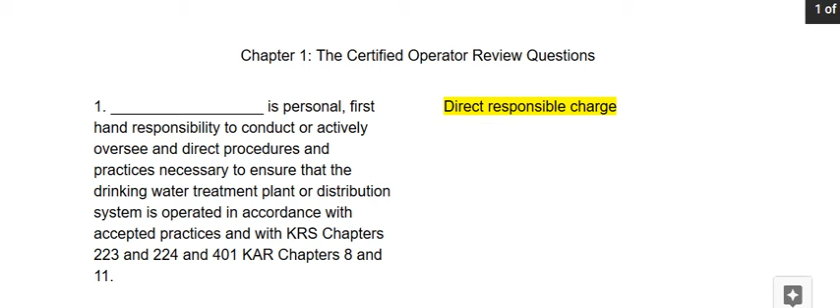Number 1. Blank is personal first-hand responsibility to conduct or actively oversee and direct procedures and practices necessary to ensure that the drinking water treatment plant or distribution system is operated in accordance with accepted practices and with KRS Chapters 223 and 224 and 401 KAR Chapters 8 and 11. The answer to number 1 is direct responsible charge.

Number 2, a certified operator shall be blank, blank, and blank in applications, reports, statements, and testimony provided to the cabinet. The answers to number 2 are objective, truthful, and complete.

Number 3, a certified operator shall ensure the blank of the samples that the operator blank, blank, or blank so that the result shall be a true representation of water quality. The answer to number 3 is integrity, collects, prepares, and analyzes.

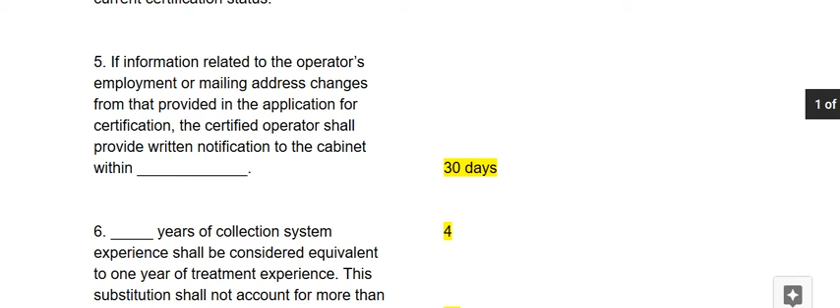Number 4, while on duty, a certified operator shall carry blank, showing the operator's current certification status. The answer to number 4 is a cabinet-issued wallet card.

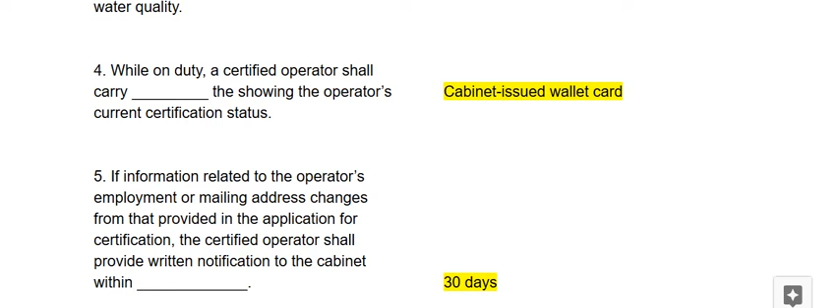Number 5, if information related to the operator's employment or mailing address changes from that provided in the application for certification, the certified operator shall provide written notification to the cabinet within blank. The answer to number 5 is 30 days.

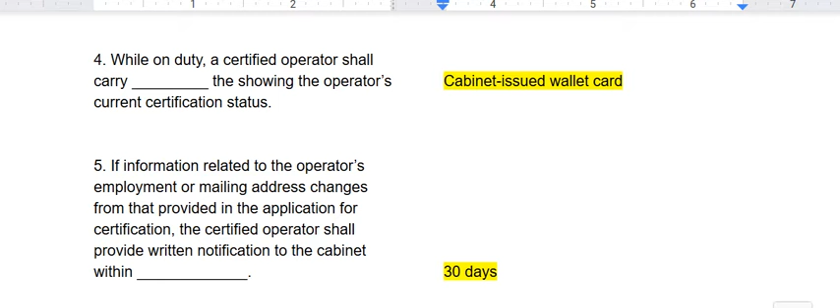Number 6, blank years of collection system experience shall be considered equivalent to 1 year of treatment experience. This substitution shall not account for more than blank % of the experience required. The answers to number 6 are 4 and 50%.

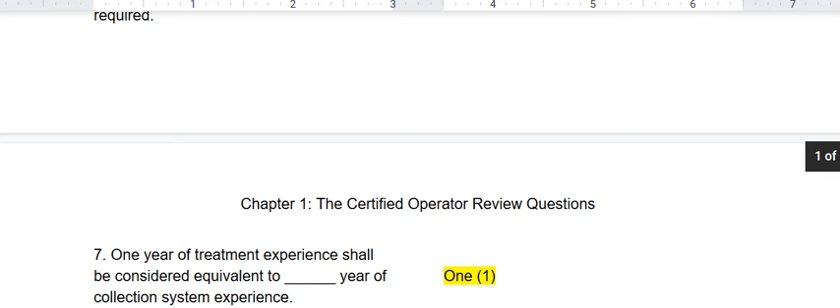Number 7, 1 year of treatment experience shall be considered equivalent to blank year of collection system experience. The answer to number 7 is 1.

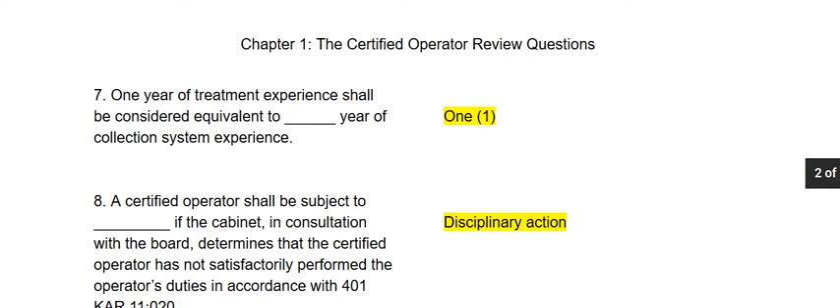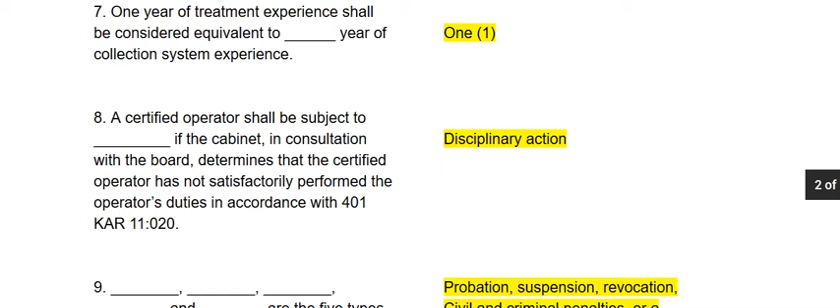Number 8, a certified operator shall be subject to blank if the cabinet, in consultation with the board, determines that the certified operator has not satisfactorily performed the operator's duties in accordance with 401 KAR 11:020. The answer to number 8 is disciplinary action.

Number 9, blank, blank, blank, blank, and blank are the 5 types of discipline that an operator can receive if the board decides that disciplinary action is necessary. The answers to number 9 are probation, suspension, revocation, civil and criminal penalties, or a combination of the 4.

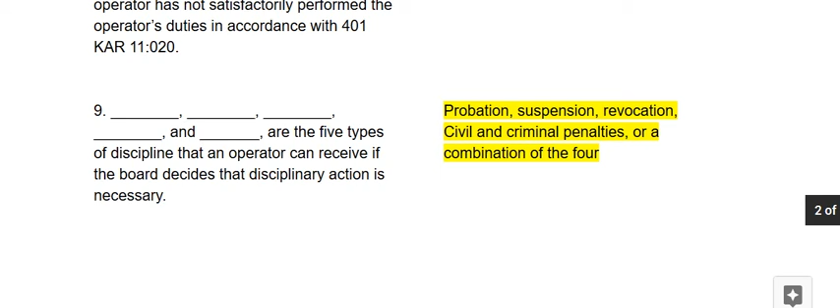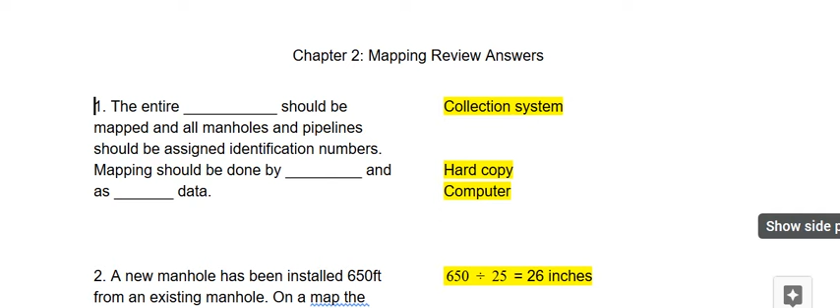Chapter 2, Mapping Review Answers. Number 1, the entire blank should be mapped and all manholes and pipelines should be assigned identification numbers. Mapping should be done by blank and as blank data. The answers to number 1 are collection system, hard copy, and computer.

Number 2, a new manhole has been installed 650 feet from an existing manhole. On a map, the scale is 1 inch equals 25 feet. What is the distance between the manholes on the map? The answer to number 2 would be 650 feet divided by 25 feet, which equals 26 inches.

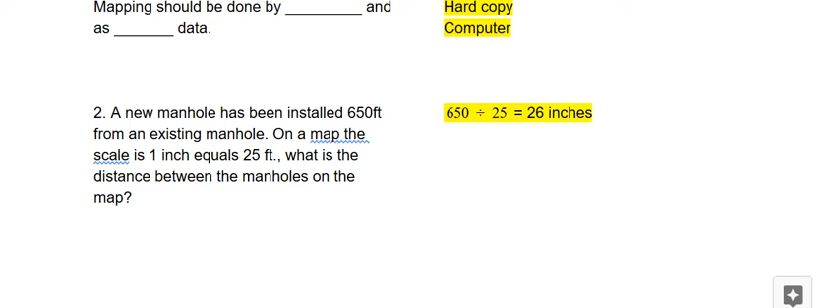Number 3, high TSS can cause problems because the solids may blank. The answer to number 3 is clog or scour pipes and machinery.

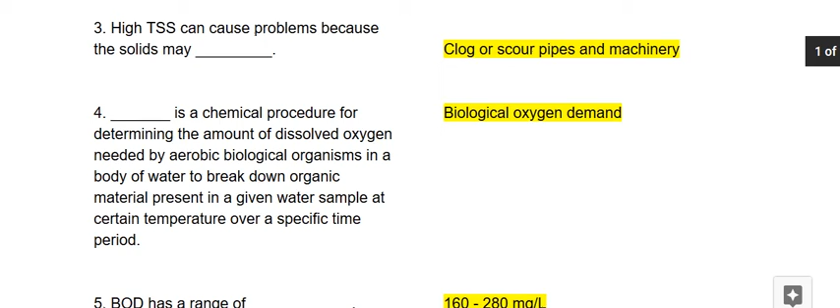Number 4, blank is a chemical procedure for determining the amount of dissolved oxygen needed by aerobic biological organisms in a body of water to break down organic material present in a given water sample at certain temperature over a specific time period. The answer to number 4 is biological oxygen demand.

Number 5, BOD has a range of blank. The answer to number 5 is 160 to 280 milligrams per liter.

Number 6. 3 common types of bacteria are blank, blank, and blank. The answers to number 6 are aerobic, anaerobic, and facultative.

Number 7. Blank blank are used to calculate hydraulic and organic loadings for domestic wastewater treatment. The answer to number 7 is population equivalents.

Number 8. What are the population equivalents for the following? BOD5 has a population equivalent of 0.17 pounds per capita per day. TSS is 0.20 pounds per capita per day. Phosphorus is 0.0048 pounds per capita per day. And flow is 100 gallons per capita per day.

Number 9. 100:5:1 is the nutrient base for blank, blank, blank. The answer to number 9 is carbon, nitrogen, and phosphorus.

Number 10. When anaerobic bacteria break down organic matter, blank can be produced. The answer to number 10 is hydrogen sulfide.

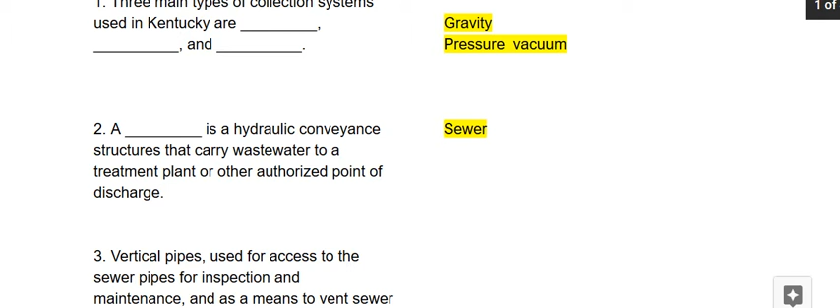Number 2. A blank is a hydraulic conveyance structure that carries wastewater to a treatment plant or other authorized point of discharge. The answer to number 2 is sewer.

Number 3. Vertical pipes used for access to the sewer pipes for inspection and maintenance and as a means to vent sewer gases are called blank. The answer to number 3 is manhole.

Number 4. What are the 5 types of sewers? The answer to number 4 is building sewers, lateral or branch sewers, main sewers, trunk sewers, and interceptor sewers.

Number 5. During peak dry weather conditions, the sewer lines must attain a velocity greater than blank to ensure that the lines will be self-cleaning, flushed out once or twice a day by a higher velocity. The answer to number 5 is 2 feet per second.

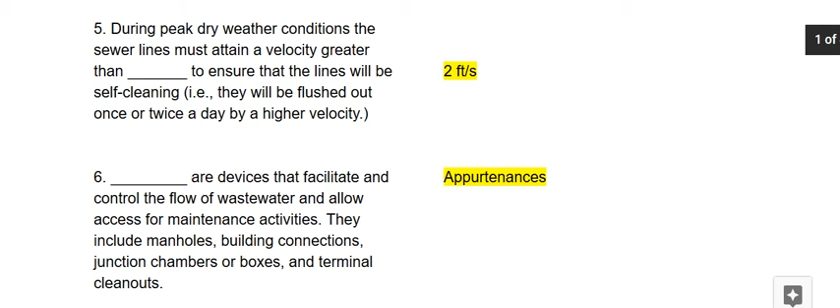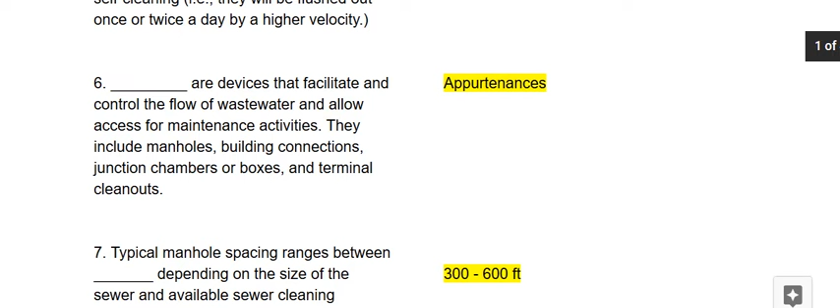Number 6. Blank are devices that facilitate and control the flow of wastewater and allow access for maintenance activities. They include manholes, building connections, junction chambers or boxes, and terminal cleanouts. The answer to number 6 is appurtenances.

Number 7. Typical manhole spacing ranges between blank, depending on the size of the sewer and available sewer cleaning equipment. The answer to number 7 is 300 to 600 feet.

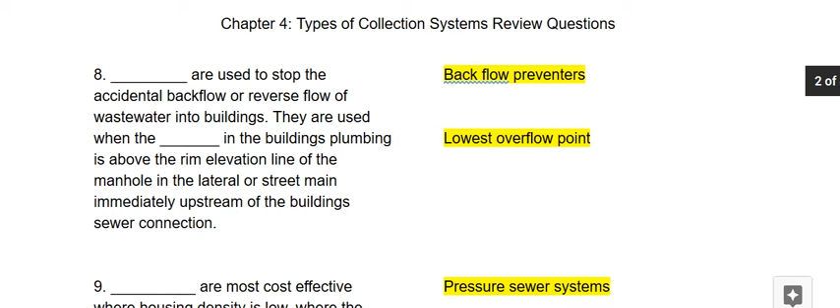Number 8. Blank are used to stop the accidental backflow or reverse flow of wastewater into buildings. They are used when the blank in the building's plumbing is above the rim elevation line of the manhole in the lateral or street main immediately upstream of the building sewer connection. The answers to number 8 are backflow preventers and lowest overflow point.

Number 9. Blank are most cost-effective where housing density is low, where the terrain has undulations with relatively high relief, where connecting several residences to a cluster pump station can be less expensive than conventional gravity systems, and where the system outfall must be at the same or a higher elevation than most or all of the service area. The answer to number 9 is pressure sewer systems.

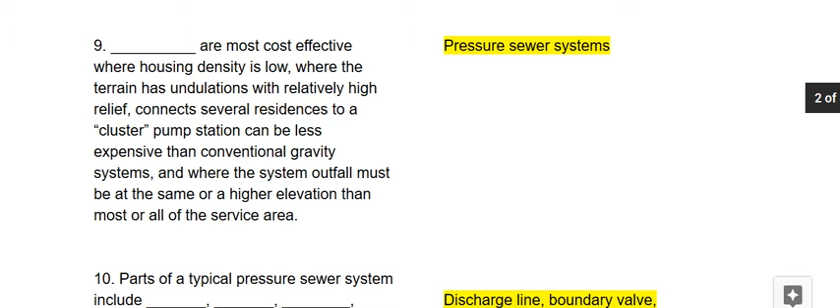Number 10. The parts of a typical pressure sewer system include blank, blank, blank, blank, and blank. The answers to number 10 are discharge line, boundary valve, pump control panel, pump unit, and building drain.

Number 11. Manholes associated with conventional gravity sewers are a source of blank and blank. The answers to number 11 are inflow and infiltration.

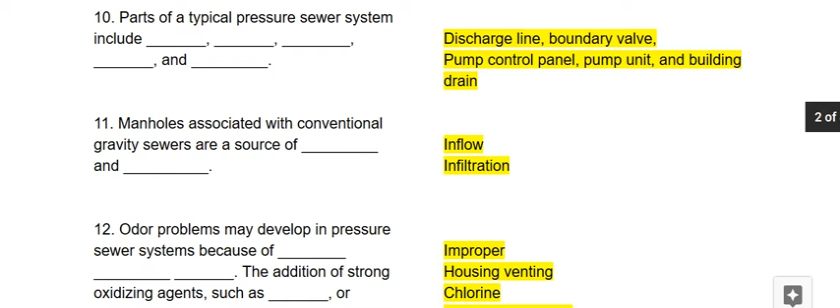Number 12. Odor problems may develop in pressure sewer systems because of blank. The addition of strong oxidizing agents such as blank or blank may be necessary to control odor where venting is not the cause of the problem. The answers to number 12 are improper housing venting, chlorine, or hydrogen peroxide.

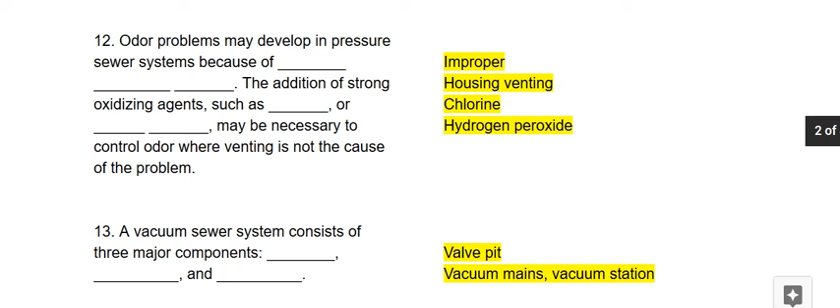Number 13. A vacuum sewer system consists of 3 major components. The answers to number 13 are valve pit, vacuum mains, and vacuum station.

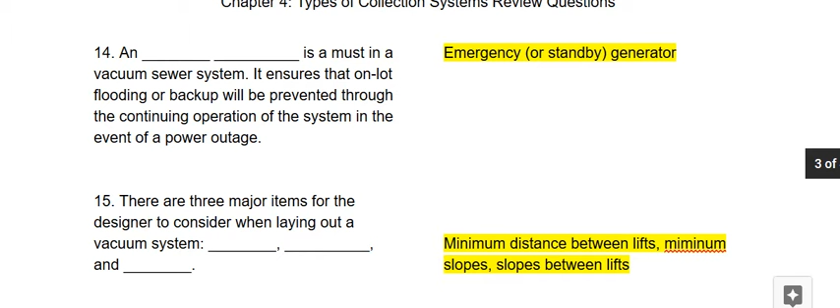Number 14. Blank is a must in a vacuum sewer system. It ensures that on-lot flooding or backup will be prevented through the continuing operation of the system in the event of a power outage. The answer to number 14 is emergency or standby generator.

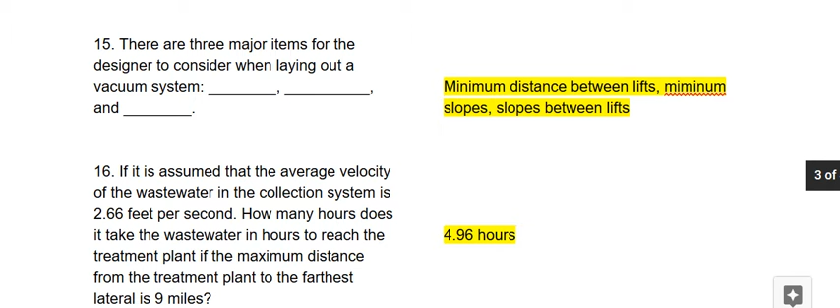Number 15. What are the 3 major items for the designer to consider when laying out a vacuum system? The answers to number 15 are minimum distance between lifts, minimum slopes, and slopes between lifts.

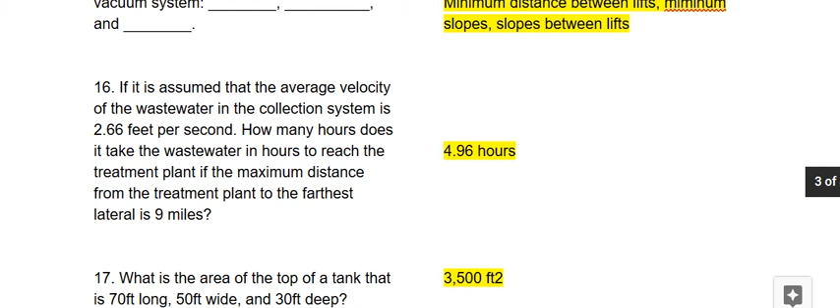Number 16. If it is assumed that the average velocity of the wastewater in a collection system is 2.66 feet per second, how many hours does it take the wastewater to reach the treatment plant if the maximum distance from the treatment plant to the farthest lateral is 9 miles? The answer to number 16 is 4.96 hours.

Number 17. What is the area of the top of a tank that is 70 feet long, 50 feet wide, and 30 feet deep? We would multiply the length times the width to find the answer. So 70 times 50 is 3,500 feet squared.

Number 18. The flow entering the leg of a T is 44 gallons per minute. If the flow through one branch is 27 gallons per minute, what is the flow through the other branch? To find the answer, you take 44 gallons per minute and subtract the flow of the one branch, 27 gallons per minute, to find the flow through the other branch. So 44 minus 27 gives you 17 gallons per minute.

Number 19. What is the daily average flow for a lift station in MGD given the following data? On April 12, 2011 at 8 a.m., it had 333,326,621 gallons. On April 19, 2011 at 8 a.m., it was 381,222,213 gallons. The answer to number 19 is 6,842,227 gallons.

Number 20. The grade for a sewer pipe is 0.7% for a length of 9,600 feet and then changes to 0.25% for an additional 5,280 feet. How many feet lower would the downstream end of the pipe be than the upstream end? The answer to number 20 is 80.40 feet.

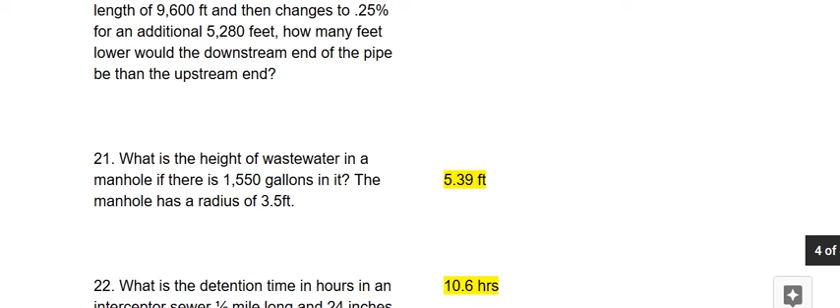Number 21. What is the height of wastewater in a manhole if there is 1,550 gallons in it? The manhole has a radius of 3.5 feet. The answer to number 21 is 5.39 feet.

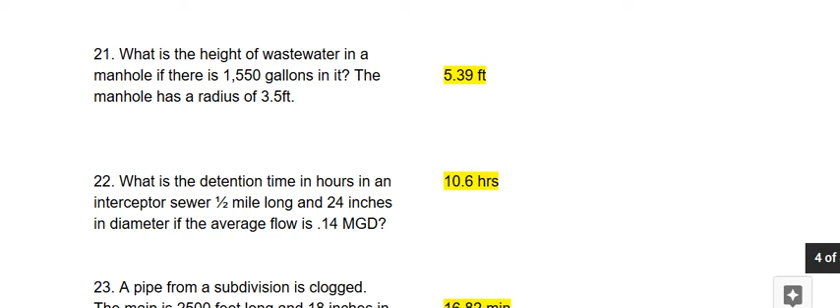Number 22. What is the detention time in hours in an interceptor sewer half-mile long and 24 inches in diameter, if the average flow is 0.14 mgd? The answer to number 22 is 10.6 hours.

Number 23. A pipe from a subdivision is clogged. The main is 2,500 feet long and 18 inches in diameter. The pipe delivers an average flow of 1,050 cubic feet per minute. The collection crew is flushing the main to remove the clog. How long should they flush the line to achieve 4 pipe volumes? The answer to number 23 is 16.82 minutes.

Number 24. A 5 feet wide rectangular channel is flowing 60 inches deep with an average velocity of 2.8 feet per second. What is the approximate flow rate? The answer to number 24 is 70 cubic feet per second.

Chapter 5. Pipes Review Questions. Number 1, blank is the inside top of a pipe and the blank is the lowest point of the inside of a pipe or manhole. The answers to number 1 are crown and invert.

Number 2, 4 common pipe materials are blank, blank, blank, and blank. The answers to number 2 are PVC, concrete, ductile iron, and vitrified clay.

Number 3, blank pipe is good for use when lots of industrial or chemical flows will be present. The answer to number 3 is PVC or plastic.

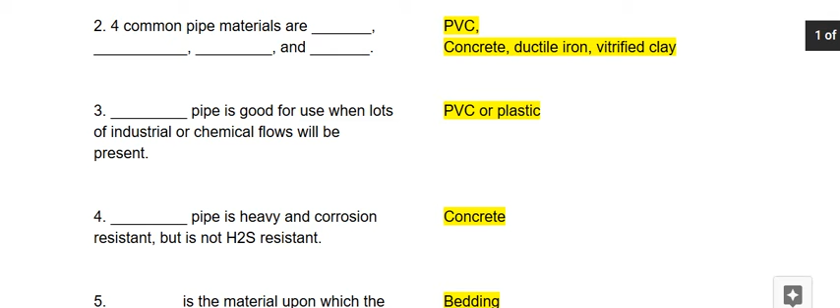Number 4, blank pipe is heavy and corrosion resistant but is not H2S resistant. The answer to number 4 is concrete.

Number 5, blank is the material upon which the pipe is laid and serves as its foundation. The answer to number 5 is bedding.

Number 6, what background information is used in determining what type of pipe best fits a particular situation? The answers to number 6 are maximum pressure conditions, soil chemistry, water table stability, installation equipment required, chemical and physical properties of the wastewater, and etc.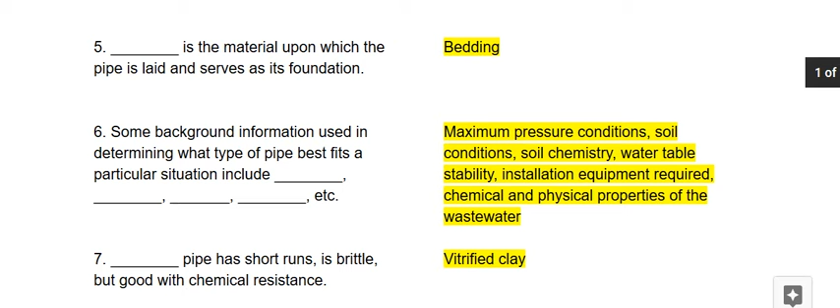Number 7, blank pipe has short runs, is brittle, but good with chemical resistance. The answer to number 7 is vitrified clay.

Number 8, larger pipe greater than blank should be supported in place so that they can be connected while supported. The answer to number 8 is 10 inches.

Number 9, the pipe material must be compatible with blank and blank chemistry. The answers to number 9 are soil and groundwater.

Number 10, the blank that will surround the pipes is a fundamental design aspect for the support characteristics, especially for flexible pipes. The answer to number 10 is mechanics of the soil.

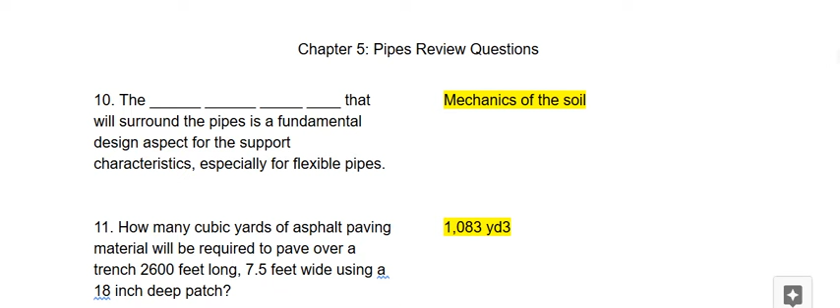Number 11, how many cubic yards of asphalt paving material will be required to pave over a trench 2,600 feet long, 7.5 feet wide, using an 18-inch deep patch? The answer to number 11 is 1,083 cubic yards.

Chapter 6, Pumps Review Questions. Number 1, popular types of pumps for wastewater applications are blank, blank, blank, blank, blank, blank, and blank. The answers to number 1 are centrifugal pumps, propeller pumps, reciprocating or piston pumps, inclined screw pumps, progressive cavity pumps, and pneumatic ejectors airlift metering pumps.

Number 2, before doing work on pumps or other equipment, it is important to practice blank principles. The answers to number 2 are lockout, tagout.

Number 3, for motors wound for blank, periodically check to ensure blank across all 3 phases. If one phase cuts out while in operation, the motor may overheat and become damaged unless it is stopped by a thermal control device. The answers to number 3 are 3-phase current and equal distribution.

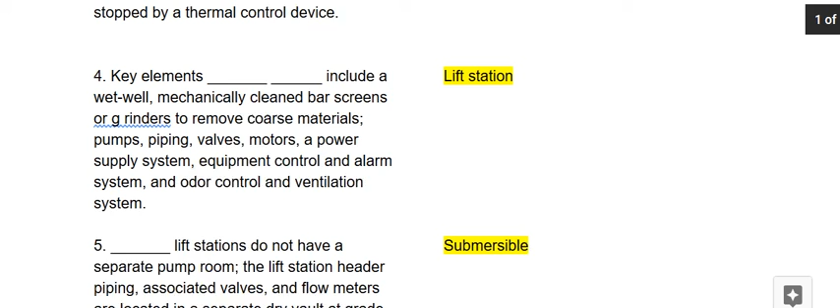Number 4, key elements of blank include a wet well, mechanically cleaned bar screens or grinders to remove coarse materials, pumps, piping, valves, motors, a power supply system, equipment control and alarm system, and odor control and ventilation system. The answer to number 4 is lift station.

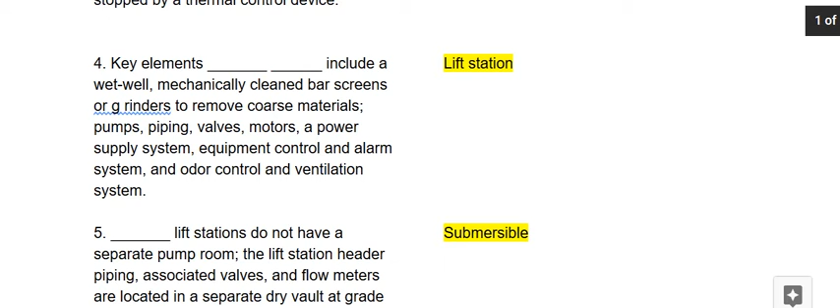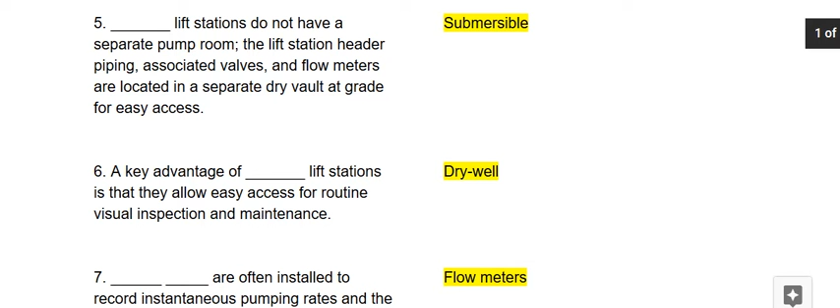Number 5, blank lift stations do not have a separate pump room. The lift station header, piping, associated valves, and flow meters are located in a separate dry vault at grade for easy access. The answer to number 5 is submersible.

Number 6, a key advantage of blank lift stations is that they allow easy access for routine visual inspection and maintenance. The answer to number 6 is dry well.

Number 7, blank are often installed to record instantaneous pumping rates and the total flow pumped. The answer to number 7 is flow meters.

Number 8, key disadvantages of lift stations include the high cost to construct and maintain and the potential for blank and blank. The answers to number 8 are odors and noise.

Number 9, wet wells typically require blank continuous air changes per hour or blank intermittent air changes per hour. The answers to number 9 are 12 and 60.

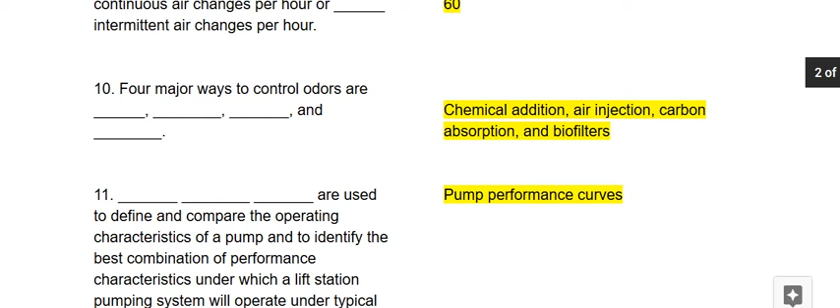Number 10: what are the 4 major ways to control odors? The answer is chemical addition, air injection, carbon absorption, and biofilters.

Number 11: blank are used to define and compare the operating characteristics of a pump and to identify the best combination of performance characteristics under which a lift station pumping system will operate under typical conditions, flows, and heads. The answer is pump performance curves.

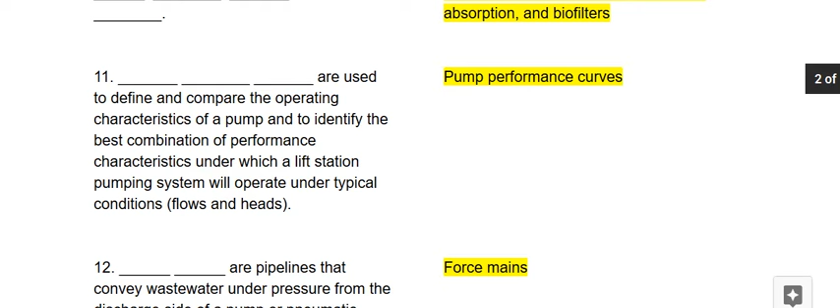Number 12: blank are pipelines that convey wastewater under pressure from the discharge side of a pump or pneumatic ejector to a discharge point. The answer is force mains.

Number 13: force mains should be designed so that they are blank and pressure in the pipe is greater than 10 pounds per square inch to prevent the release of gases. The answer is always full.

Number 14: blank are installed to regulate wastewater flow and pressure in the force mains. The answer is valves.

Number 15: the blank formula is recommended for the design of force mains. This formula includes a roughness coefficient C, which accounts for pipeline hydraulic friction characteristics. The roughness coefficient varies with pipe material, size, and age. The answer is Hazen-Williams.

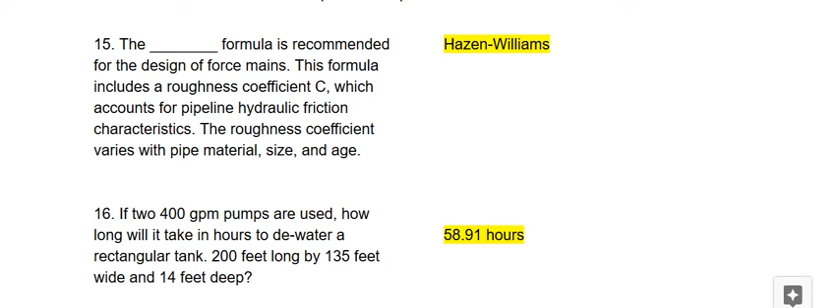Number 16: if two 400 GPM pumps are used, how long will it take in hours to dewater a rectangular tank, 200 feet long by 135 feet wide and 14 feet deep? The answer is 58.91 hours.

Number 17: two 50 horsepower pumps operate a lift station. The lift station runs 20 hours per day. The power in this municipality is charged at a rate of 11 cents per kilowatt hour. What is the cost per day for running the pumps? The answer is $164.12.

Number 18: a pump station has been averaging a screenings removal of 4.2 cubic feet per million gallons. The average daily flow to the pump station is 7.33 mgd. How many days will it take to fill a screen with 159 cubic feet capacity? The answer is 5.16 days.

Number 19: what is the volume of a tank in gallons if it is 90 feet long, 60 feet wide, and 27 feet deep? To find the volume, you would multiply the length times the width times the depth. So 90 times 60 times 27 gives you an answer of

1,090,584 gallons. Number 20: wastewater is pumped into an 8-inch line by a 500 gallon per minute pump that is 87% efficient. What is the velocity of the wastewater in the line? The answer is 3.18 feet per second.

Number 21: a lift station pumps 0.8 mgd of wastewater per day. The water contains an average of 226 pounds of solids. How much chlorine in milligrams per liter would be needed for keeping this system fresh? The answer is 33.88 milligrams per liter.

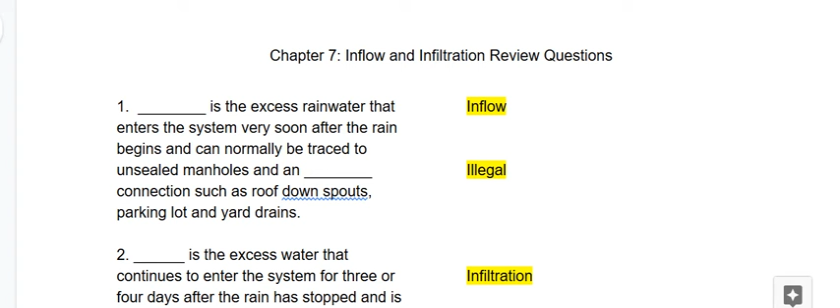Number 2. Blank is the excess water that continues to enter the system for 3 or 4 days after the rain has stopped and is the result of groundwater seeping into the system through breaks in the line and unsealed pipe joints. The answer to number 2 is infiltration and groundwater.

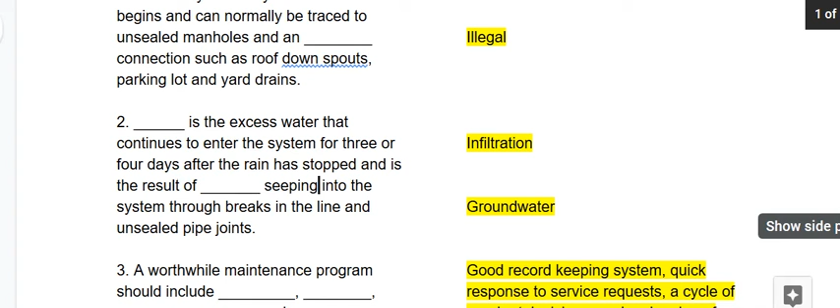Number 3. What should a worthwhile maintenance program include? The answer to number 3 is a good record-keeping system, quick response to service requests, a cycle of regular televising, regular cleaning of the system, and regular attention to corrosion protection.

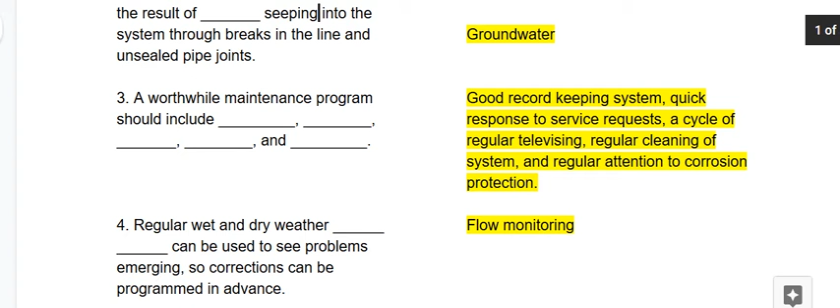Number 4. Regular wet and dry weather flow monitoring can be used to see problems emerging so corrections can be programmed in advance. The answer to number 4 is flow monitoring.

Number 5. What techniques are usually employed in the I&I or SSES study? The answer to number 5 is flow monitoring, interviews of maintenance personnel and review of repair records, visual inspections of lines and manholes, smoke and dye testing, and televising the lines.

Number 6. Basins with high inflow should be investigated further using smoke and dye testing. The answer to number 6 is smoke and dye testing.

Number 7. Basins where infiltration is the predominant cause can be investigated using joint testing, visual inspections, and televising. The answer to number 7 is infiltration.

Number 8. What are the common sources of inflow and infiltration through manholes? The answer to number 8 is holes in manhole covers, poor fit between manhole cover and rim, cracks and holes in the pavement around the manhole rim, and cracks and misalignment.

Number 9. If there are significant cracks or holes in the pipeline, the smoke will come up through the ground above the pipe. If roof drains and catch basins connected to the smoke line will emit smoke. The smoke testing must be done during dry weather. The answer to number 9 is smoke and dry weather.

Number 10. If the surface is flooded with dyed water and it gets into the pipe, it has entered through holes or cracks, and signs of the dyed water will show up at the nearest manhole. The answer to number 10 is dyed.

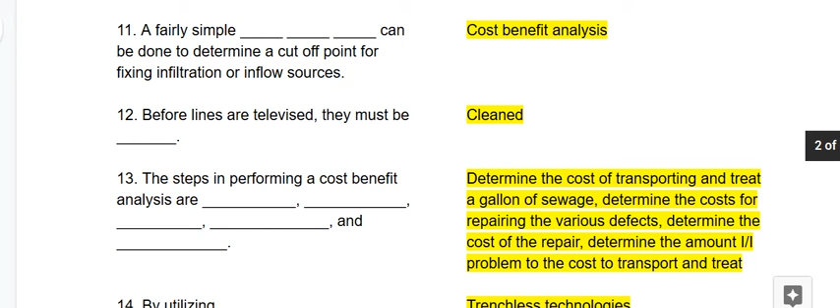Number 13. What are the steps in performing a cost-benefit analysis? The answer to number 13 is to determine the cost of transporting and treating a gallon of sewage, determining the cost for repairing the various defects, determining the cost of the repair, and to determine the amount of I&I problem to the cost to transport and treat.

Number 14. By utilizing trenchless technologies, rehabilitation and repair can often be performed without interruption of sewer service or traffic disruption. The answer to number 14 is trenchless technologies.

Number 15. What may the list of methods used to remove inflow at residences include? The answer to number 15 is disconnecting roof leaders, sump pumps, foundation drains, or other illegal or improper connections from the sanitary sewer system.

Number 16. A float is placed in a manhole. If the float travels 600 feet in 3 minutes 30 seconds, what is the estimated velocity in the channel in feet per second? The answer to number 16 is 2.86 feet per second.

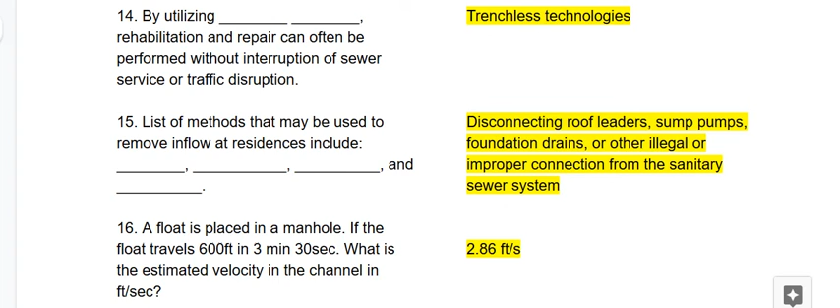Number 17. A sewer line is to be filled with a root control substance containing 268 milligrams per liter of a specific chemical. How much chemical in pounds would be needed for a 700-foot section of 10-inch pipe? The answer to number 17 is 6.37 pounds.

Number 18. The cost to run a collection system is $2 million per year. The total flow through the collection system is 51 million gallons. What is the wastewater cost per gallon of this system? The answer to number 18 is 4 cents.

Chapter 8, Inspection and Cleaning Review Questions.

Number 1. Blank sewer line cleaning and inspecting sewer lines are essential to maintaining the capacity of the sewer and maintaining a properly functioning system. The answer to number 1 is non-emergency.

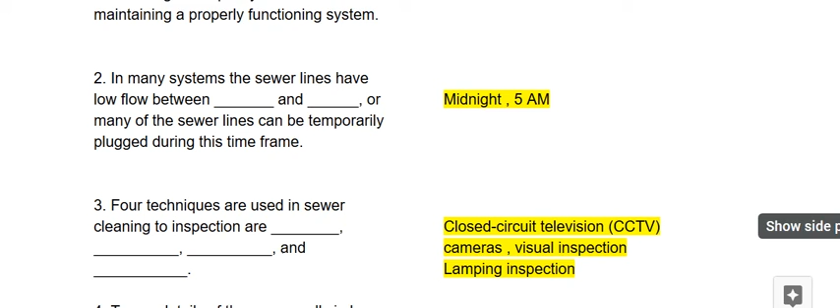Number 2. In many systems, the sewer lines have low flow between blank and blank, or many of the sewer lines can be temporarily plugged during this time frame. The answer to number 2 is midnight and 5 a.m.

Number 3. What are the 4 techniques used in sewer cleaning to inspection? The answer to number 3 is closed-circuit television, CCTV, cameras, visual inspection, and lamping inspection.

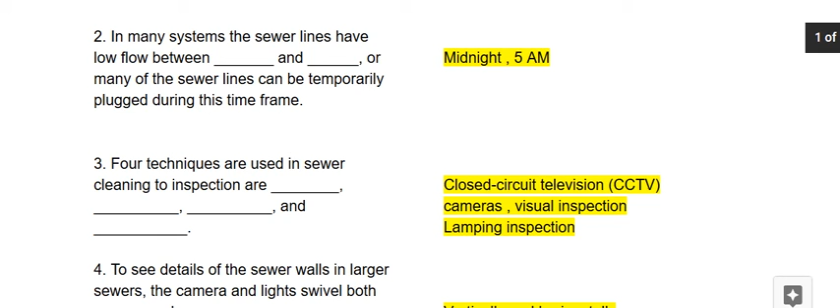Number 4. To see details of the sewer walls in larger sewers, the cameras and lights swivel both blank and blank. The answers to number 4 are vertically and horizontally.

Number 5. Inspectors should thoroughly check the physical conditions of blank, and covers or any exposed brickwork, and the visibility of manholes and other structures. The answers to number 5 are stream crossings and manhole frames.

Number 6. 2 forms of mechanical cleaning are blank and use of a blank. The answers to number 6 are jetting and bucket truck.

Number 7. The primary benefit of implementing a sewer maintenance program is the reduction of blank and other blank from the collection system due to substandard sewer conditions. The answer to number 7 is sanitary sewer overflows, basement backups, and release of wastewater.

Number 8. CCTV should account for blank percent of the time used for inspection and cleaning. The answer to number 8 is 6.8%.

Number 9. The ultimate solution to blank is to trap and remove it. The answer to number 9 is grease buildup.

Number 10. Blank is also vital to the success of such a maintenance program. The answer to number 10 is record keeping.

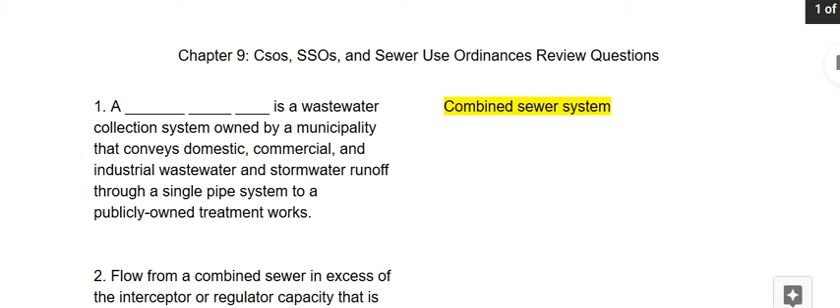Number 1. A blank is a wastewater collection system owned by a municipality that conveys domestic, commercial, and industrial wastewater and stormwater runoff through a single pipe system to a publicly owned treatment works. The answer to number 1 is a combined sewer system.

Number 2. Flow from a combined sewer in excess of the interceptor or regulator capacity that is discharged into a receiving water without going to a POTW is blank. The answer to number 2 is combined sewer overflow.

Number 3. A blank is a wastewater collection system owned by a municipality that conveys domestic, commercial, and industrial wastewater and limited amounts of infiltrated groundwater and stormwater to a POTW. The answer to number 3 is a sanitary sewer system.

Number 4. A blank regulates the use of public and private sewers and drains, private wastewater disposal, the installation and connection of building sewers, and the discharge of waters and wastes into the public sewer system. The answer to number 4 is sewer use ordinance.

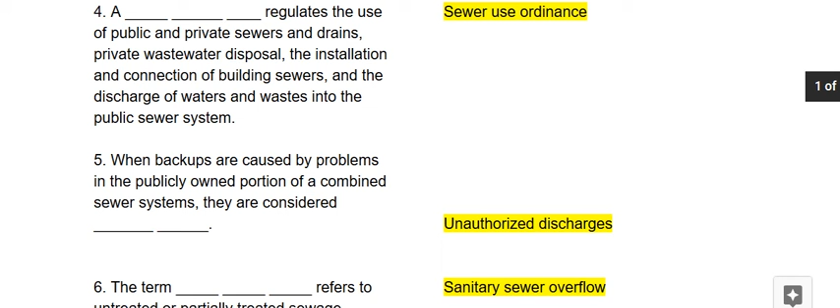Number 5. When backups are caused by problems in the publicly owned portion of a combined sewer systems, they are considered blank. The answer to number 5 are unauthorized discharges.

Number 6. The term blank refers to an untreated or partially treated sewage release from a sanitary sewer system. The answer to number 6 is sanitary sewer overflow.

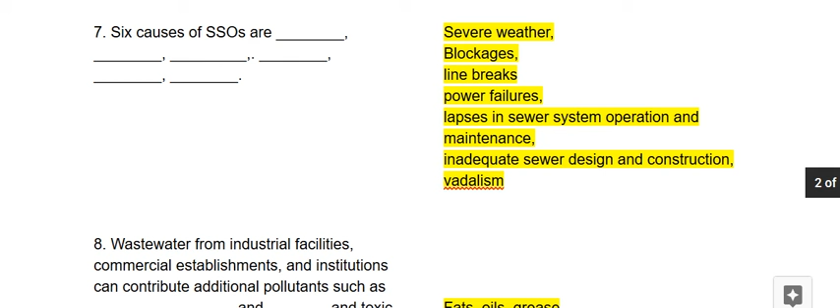Number 7. What are the 6 causes of SSOs? The answer to number 7 is severe weather, blockages, line breaks, power failures, lapses in sewer system operation and maintenance, inadequate sewer design and construction, and vandalism.

Number 8. Wastewater from industrial facilities, commercial establishments, and institutions can contribute additional pollutants such as blank, blank, and toxic substances, including metals and synthetic organic compounds. The answer to number 8 is fats, oils, and grease.

Chapter 10, Hazards Review Questions.

Number 1. Wastewater collection system operators are exposed daily to numerous health risks. These health risks include exposure to the following. The answer to number 1 is gases, chemicals, endotoxins, exotoxins, and pathogens.

Number 2. Asphyxiating, irritating, and toxic gases produced through the anaerobic degradation of carbonaceous waste include the following. The answer to number 2 are ammonia, NH3, carbon dioxide, CO2, carbon monoxide, CO, hydrogen sulfide, H2S, and methane, CH4.

Number 3. Exposure to blank and the potential for disease transmission through contact with blank, blank, blank, blank, blank, and work surfaces are considered to be risks for wastewater personnel. The answer to number 3 is pathogens, pathogen concentrated wastewater, aerosols, compost, foam, and sludge.

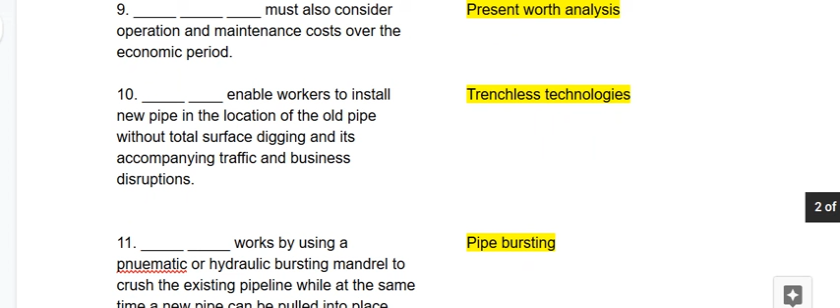Number 9. Present worth analysis must also consider operation and maintenance costs over the economic period.

Number 10. Trenchless technologies enable workers to install new pipe in the location of the old pipe without total surface digging and its accompanying traffic and business disruptions.

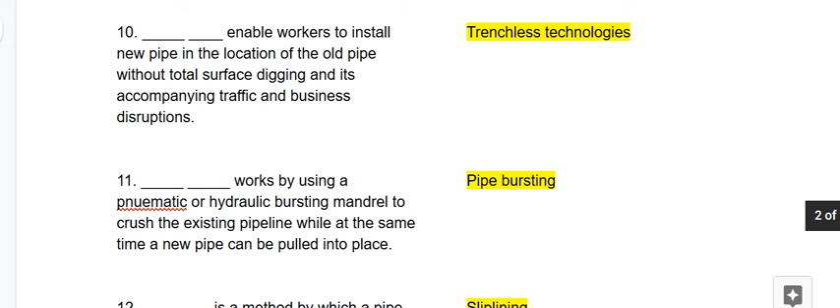Number 11. Pipe bursting works by using a pneumatic or hydraulic bursting mandrel to crush the existing pipeline while at the same time a new pipe can be pulled into place.

Number 12. Slip lining is a method by which a pipe is inserted into an existing line by either pulling or pushing continuous.

Number 13. Estimate the construction costs of a sanitary sewer project. The project consists of 11,500 feet of 24-inch sewer and 25 manholes. Costs are estimated below. Excavation and backfill is $19.45 per linear foot. Pipe costs to have them delivered is $8.89 per linear foot. A manhole complete is $3,000 each. The answer to number 13 is

$400,910. Number 14. A sewer pipe has failed and 174 feet of 36-inch vitrified clay pipe must be replaced. How many 4-foot sections are required? You would take your 174 feet and divide it by 4, then round your answer up to get 44. So the answer to number 14 is 44 4-foot sections.